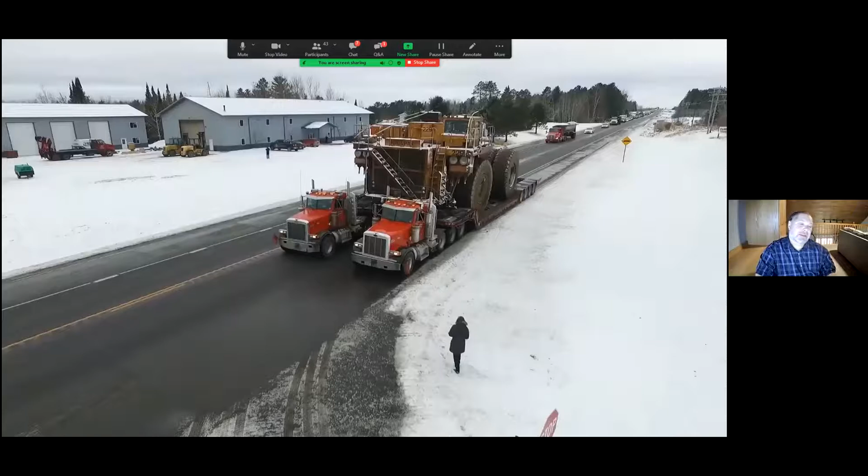The reality of transporting oversized overweight loads becomes more difficult each year. Identifying and maintaining sustainable routes is also becoming more problematic. Oversized commodities are getting larger and heavier each year, making it difficult to compete with the aging road system.

And this couldn't be truer than with the wind energy transportation section. The journey of the wind blade is a story that I'd like to share with you today. These blades attach to the wind turbines that create electricity, and they're getting much longer. Today, the average wind blade is about 300 feet long when it's loaded onto the truck. Imagine the size of something like this going down the road—it's nearly the size of a football field. So they are extraordinary in size.

Green energy wind farms continue to grow in number across the country, increasing the demand for these large components to be delivered by truck. Sometimes trying to get into remote locations is difficult due to road design.

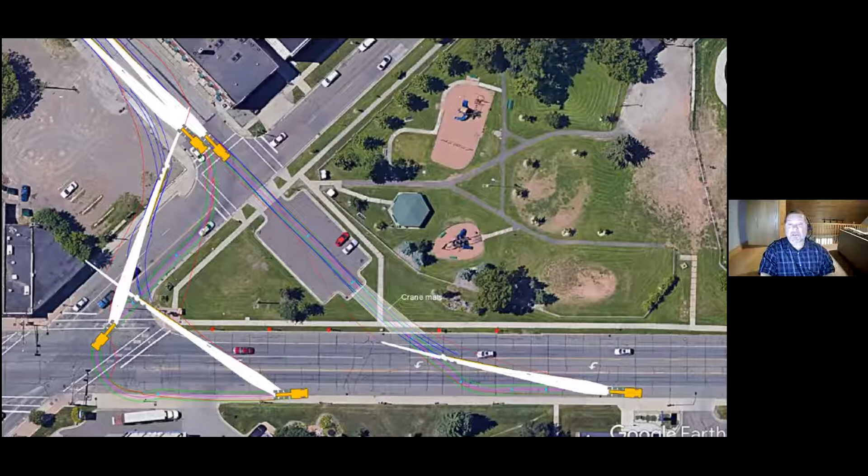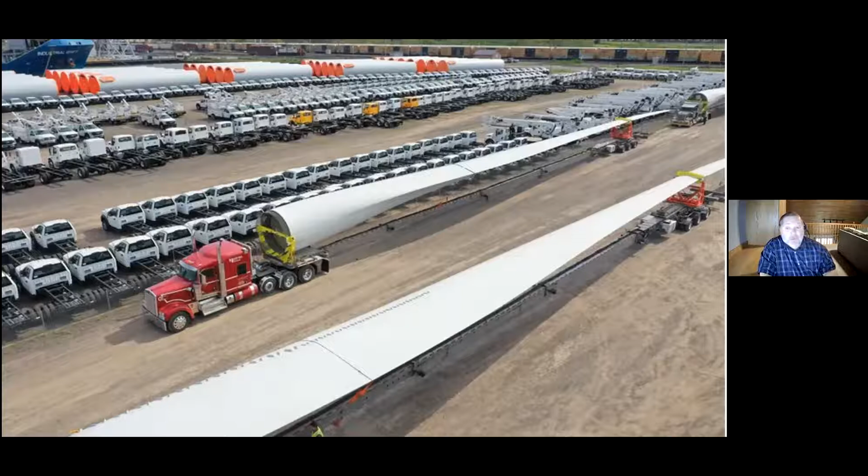The wind blades that arrive by ship are offloaded onto these specialized trucks here that you see, and they're often driven from the port right to their destination, that being the wind farm, somewhere in the United States. Sometimes wind blades will come to the Port of Duluth and then go out to the state of Wyoming, South Dakota, or North Dakota.

So I'm going to share a video. This is a neat video - actually a video of blades being transported from the manufacturer in Spain that I just mentioned to their Castellon port, which is where they load their ships. These videos show the massive size and complexities of moving these large wind blades. I'll apologize now, the video quality isn't the best, but it still gives you a good idea of how big these really are and maybe what some of the challenges are with the transportation system.

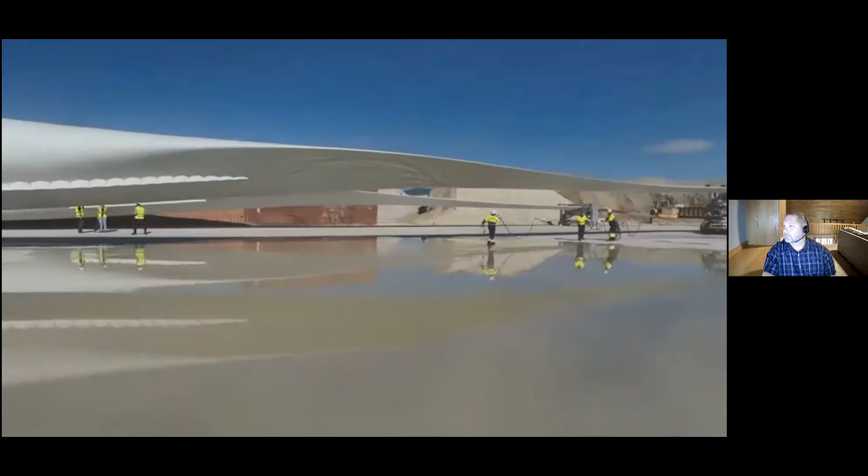that's it for that video.

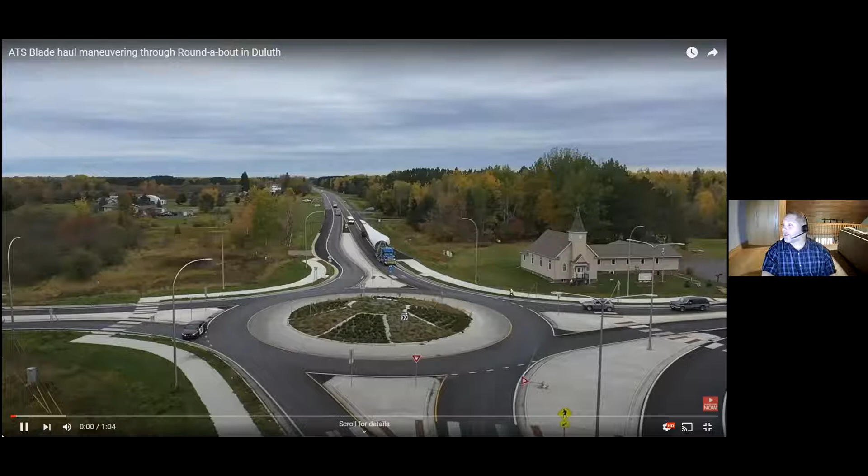With these long wind blades, they can't just go straight through or go down the normal lane of travel. They have to do special maneuvers just to get through. This is an example of a move just outside of Duluth in one of our own roundabouts and how that's actually done.

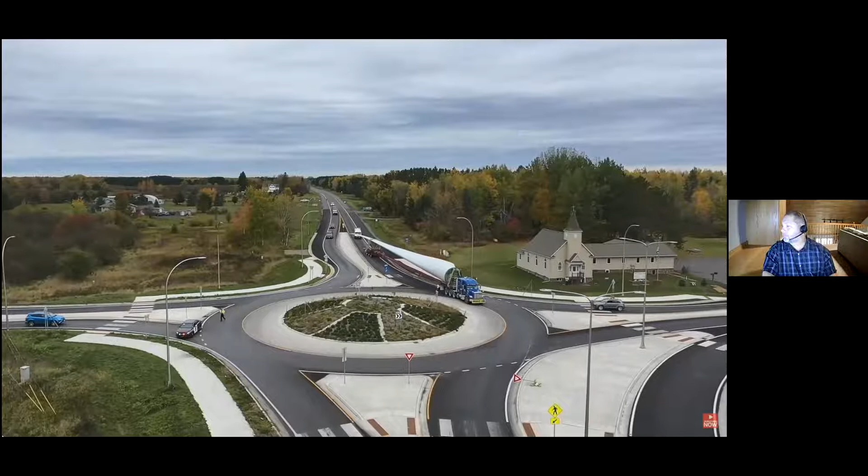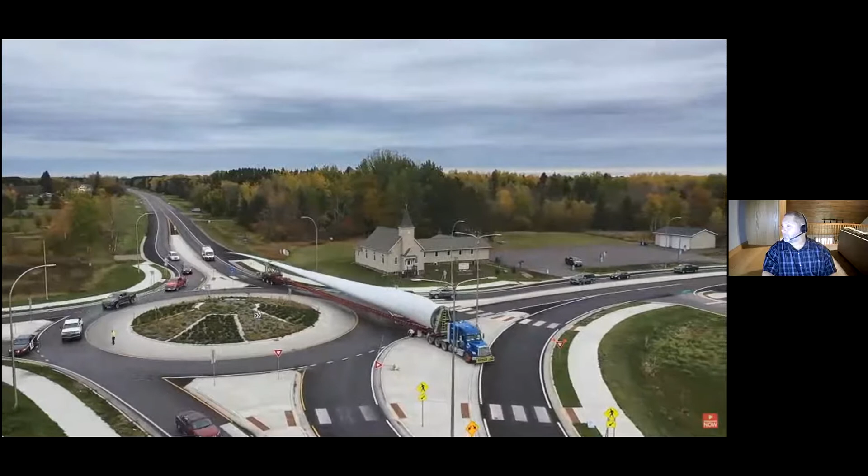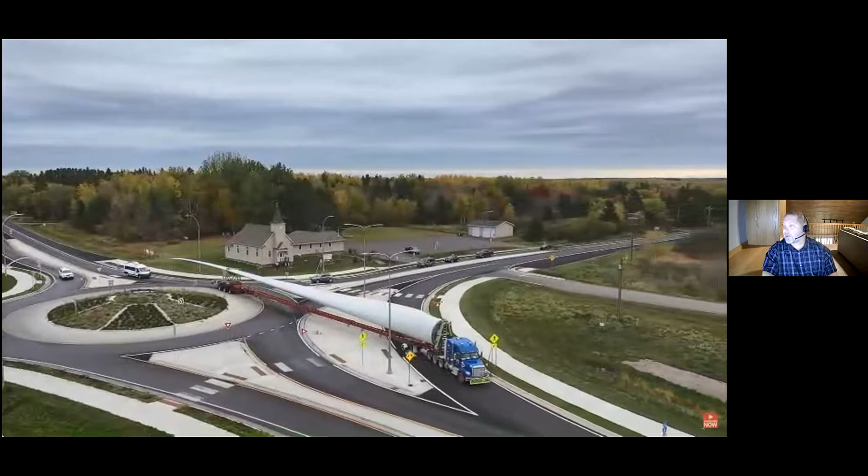Now, when you look at our roundabout designs here too, you can see that the engineers have kind of designed these with wind blades in mind, with sloped curbs, removable signage, a large truck apron on the roundabout circle itself, which help.

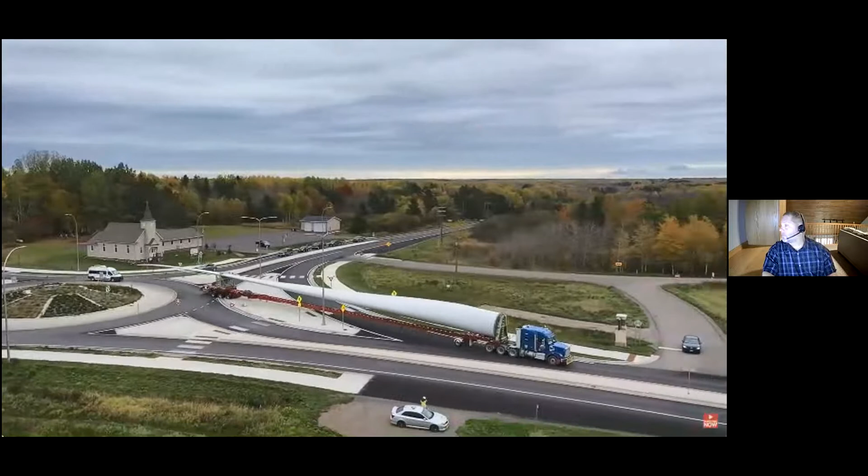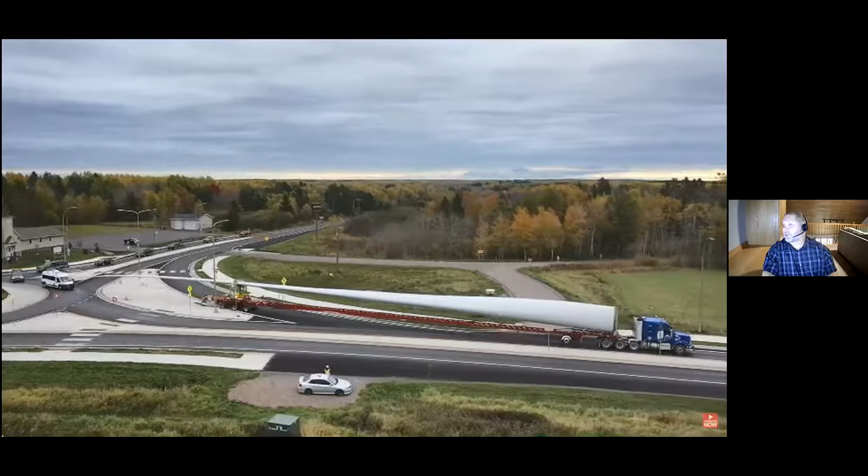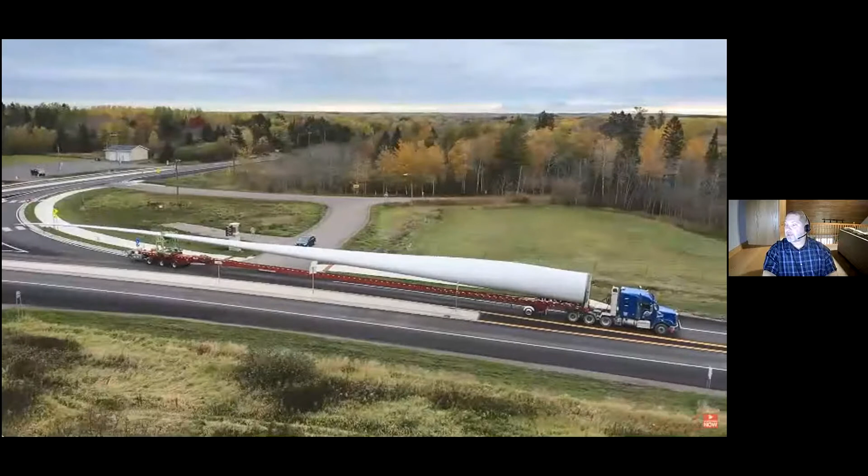But you can see even in that short amount of time, just the traffic impacts already, traffic starting to back up, just because it takes a significant amount of time for these to actually maneuver and travel through circumstances such as this. Again, with a lot of these vehicle types, they have special articulating rear axles, so they are hydraulic steering. So there is somebody that walks behind or drives behind in a vehicle and actually steers that vehicle from the backside to help manage that turn.

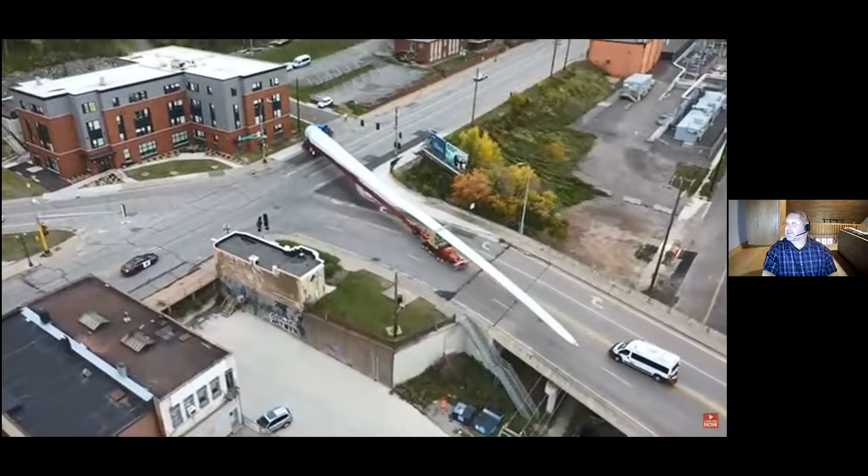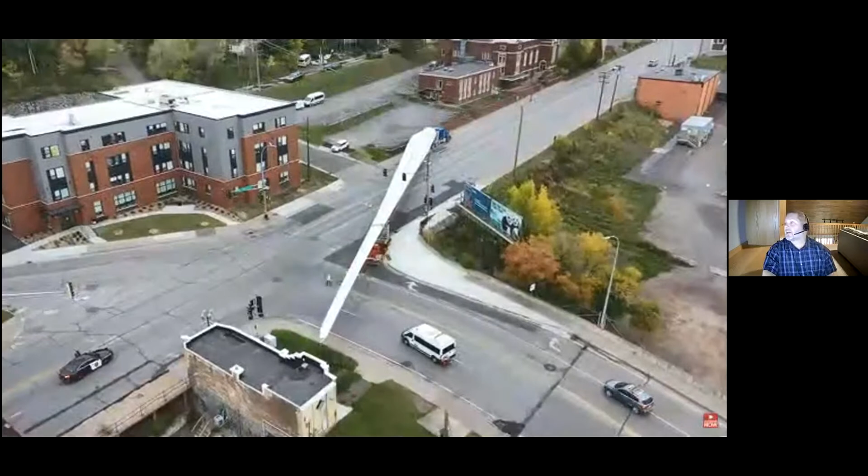At this particular intersection, they had to remove a bunch of infrastructure. So right now where you see that blade swinging, there was a bus stop there where people would be sitting waiting for their bus. They had to take all of that down for this particular project, which actually was about 170 blades. So for that entire summer, significant changes had to be made just for that specific intersection to mitigate these moves.

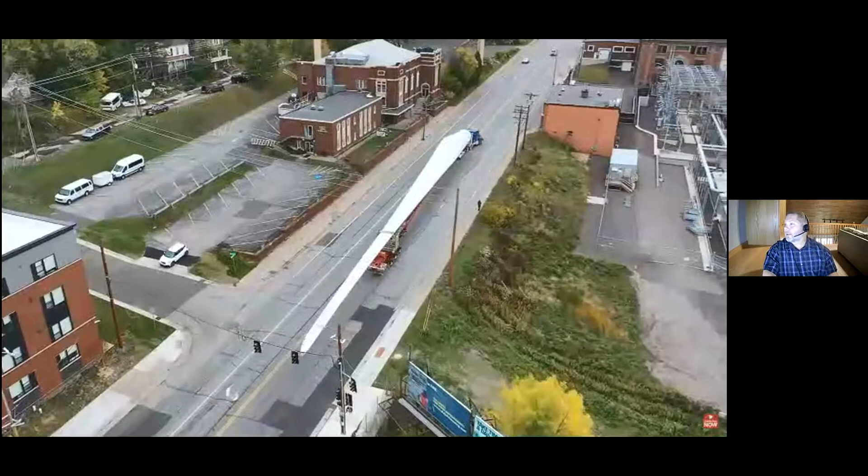Here's another situation that we've seen throughout the state with these wind blades getting so large. And again, you go back and you look at our aging infrastructure, our road designs. Back when these were built, you know, things were much different. And now you introduce something like this.

Here's an example of a truck that needs to make a right-hand turn. So from left to right, you can see, I'll kind of use my pointer here too. I think you'll be able to see that. But he started here and the driver was going this way. Well, because of the swing, they were unable to make this right-hand turn. So they had to do what's called a three-point turn. So they went straight. They backed this long blade up this angled hill here and then continued forward to make that turn. I actually have a couple of examples of what that looks like on some of our state highways.

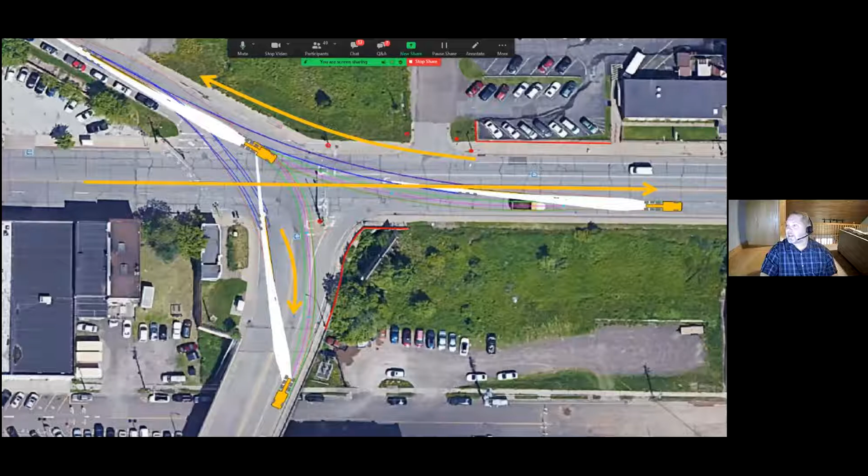And this is why sustainable routes are so important. That's our goal. In oversized overweight permits, the biggest thing that we can do is identify and determine a sustainable route for the duration of a project. And again, when you're talking about 1,500 trucks in a 4 to 5 month period, that's a lot of movement. And you cannot always be tying up traffic like that at those three-point turn locations where turns need to be managed. So, you know, in summary, moving wind is a challenge for the good of sustainability, right?

In the years to come, it's only going to expand. So really, seeing what you've seen and knowing what you know, what is the direction of our future, and what can you be thinking about now that would help improve the transportation system for commodities like this.

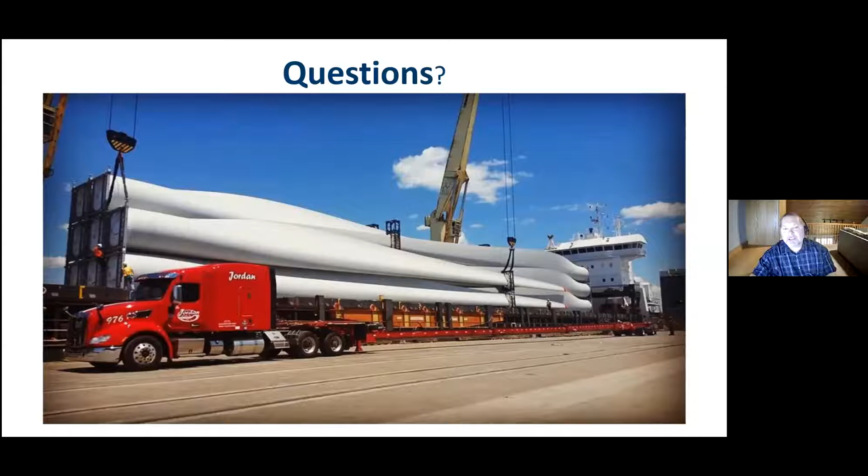Thank you. Yeah, Rob, that's great. We do have a bunch of questions. I have one before I let everybody else ask. Do they normally move them one at a time, or is it like a big train of these moving down to the wind turbines? That's a really good question.

So we have certain, we'll call them rules, where we normally do not allow what we call convoying. But in situations like this, we do make exceptions.

These will generally go out 3 at a time in Minnesota, but they have to maintain a minimum of a 1 mile distance or even a 15-minute span between, so that when they're making special maneuvers, they're not tying up a specific intersection for too long. One goes through traffic and clears, another comes through, clears, just to keep the pace of things. Because if everybody went through at once, it could tie up a busy intersection for 15, 20, 30 minutes. So we try to avoid that.

We've got a good question from Megan. She says, why don't they use airplanes to drop the blades off? Megan, wouldn't that be great? I would love it. Even big helicopters. That would make it so much easier.

I think the problem is, how would you land the plane close enough to the site, the wind farm? A lot of these wind farms are out in the country, in farming communities, in rural areas. It would be hard to get the plane in there.

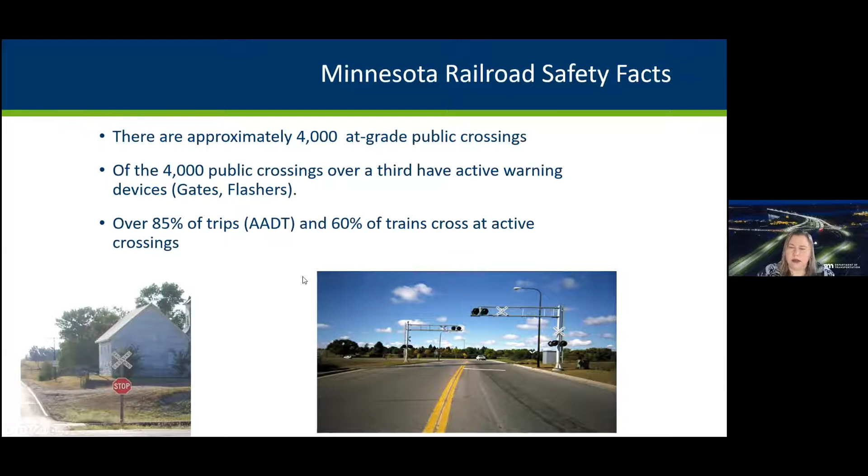All right, so what is all this stuff that we have for safety? On the left, we have a passive crossing. It has a crossbuck, which is this, a stop sign. It could be a yield sign. And what you can't see here is there's a little ENS sign. I'll talk about that in a minute.

Over here on the active crossing, we have gates, which are a little bit difficult to see. They're up and down here. They're in the vertical position, but you've seen those. Those will come down and stop traffic from crossing the tracks when a train is coming through. We have cantilevers at some crossings that will have lights flashing over the top of the traffic. We have the flashers, and we have that crossbuck there again.

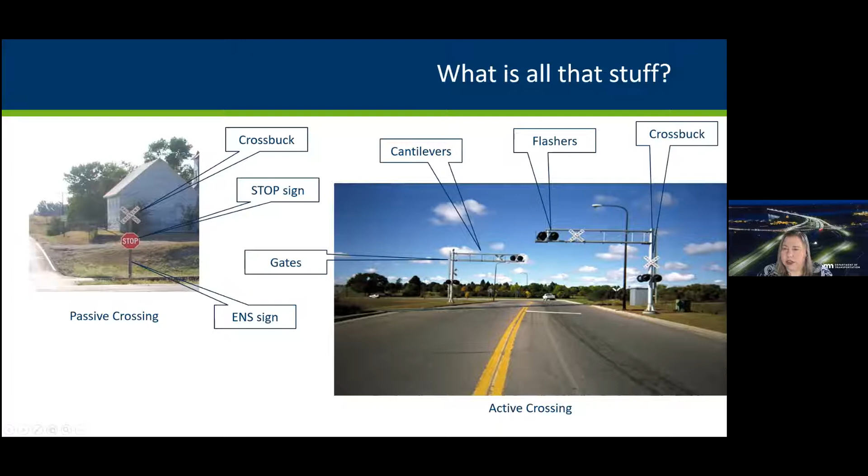And what you couldn't really see very well is at every crossing, we have this little blue sign. I'm going to talk about that again in a little bit, but it's called the ENS sign. It's an emergency notification sign, and it's at every crossing.

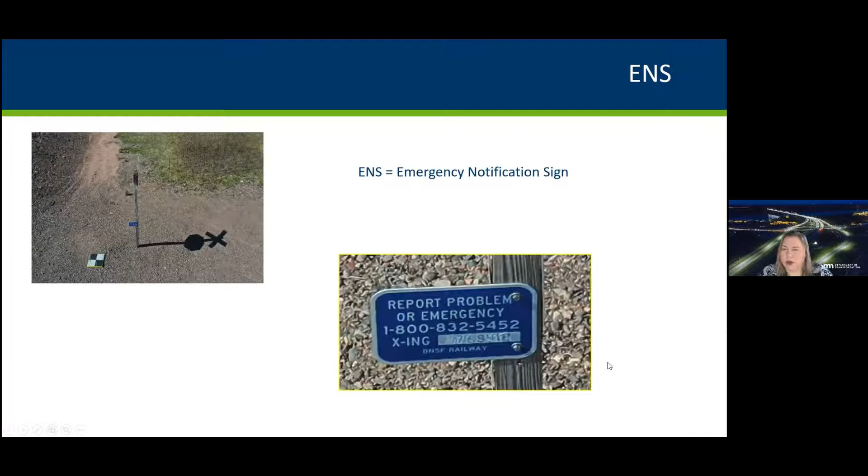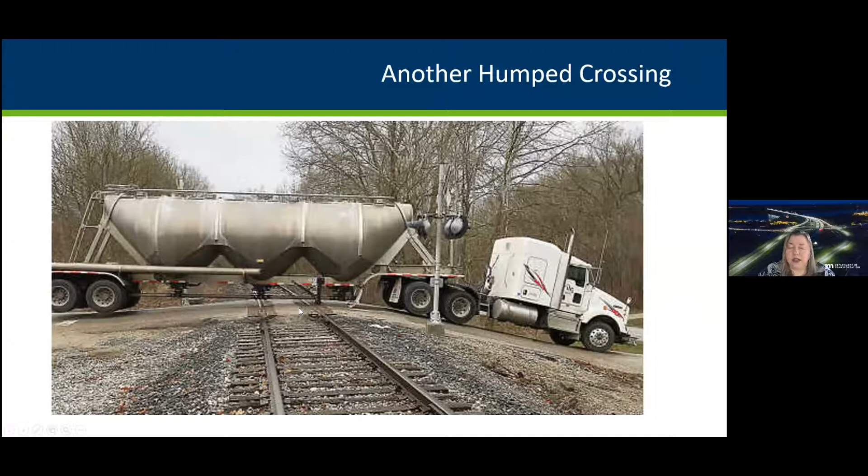Here's another example of a humped crossing. If you notice, there's a piece right in the middle here of this truck that got hung up and now is in the down position, and the back wheels are hanging in the air, and the wheels behind the cab are also in the air. We've only got two wheels on the ground there. So obviously that truck is stuck and is going to need some help getting off of those train tracks as well.

So if you're caught in a situation like this, as a truck driver, what do you do when you're stuck on the tracks? First of all, get everybody out of the vehicle. If you have injuries, someone needs to call 911. And then you need to find that little blue sign that I talked about and call the number, which goes directly to the railroad dispatch. Give the dispatch operator the USDOT crossing number and all of the details. They can radio ahead to their crews on the trains, and have them slow down and stop so that they don't have to slam on their brakes and more than likely hit someone because they didn't know that they were there.

Like I said, each one of those has its unique 800 number that goes right to the dispatch of the correct railroad, and there is a number that corresponds to each crossing.

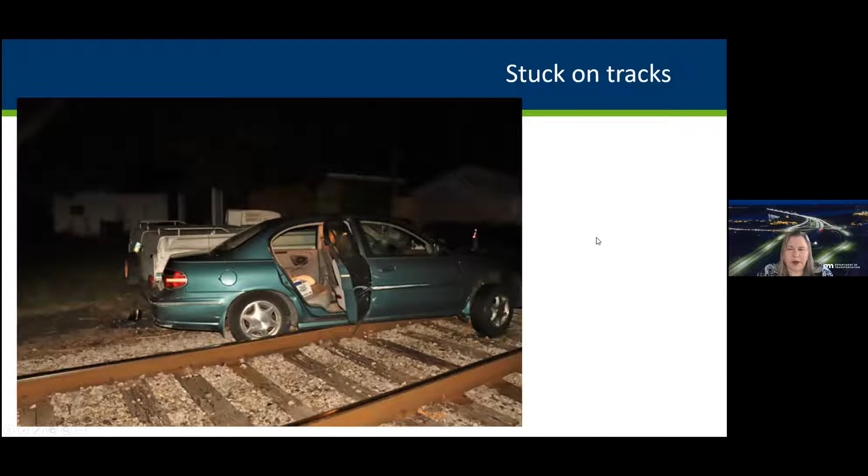Here's another incident where someone made a mistake and turned down a railroad track thinking it was a street. They got stuck on the track. Again, they were able to get out, and they called 911, who called the railroad dispatch. People make mistakes, and truck drivers and passenger cars are no exception to that rule. So that's why we have those signs, and everyone needs to know what to do in these situations.

So I'm going to talk a little bit about some research that we've been working on, or participating in, here in our office. This is a humped crossing, like I showed you. This spring, we went out and did some experiments using drones to inspect these railroad crossings. Like I said, we have over 4,000 crossings that I'm responsible for.

Within a 3-year period, I need to send somebody out and take 12 pictures at each crossing, multiple measurements and data points, and you can imagine that takes a lot of time. From the picture here that was captured by my consultant, I'm not sure you can really tell, but that's got quite a slope to it, and it's quite a hazard to trucks and large vehicles.

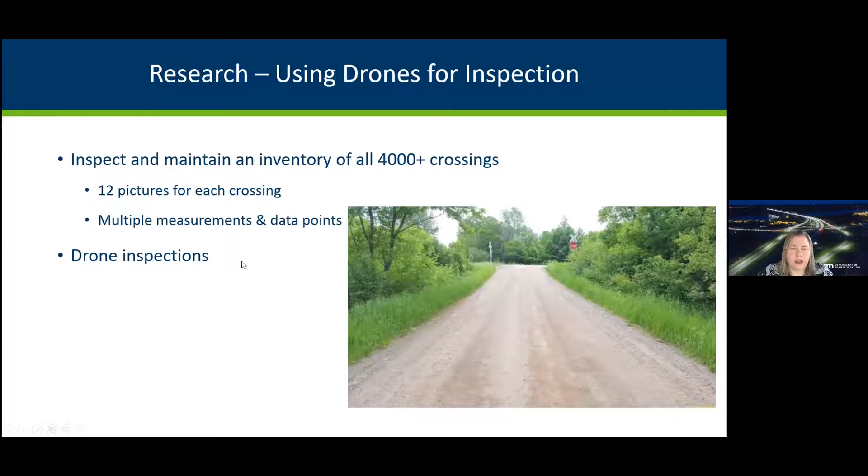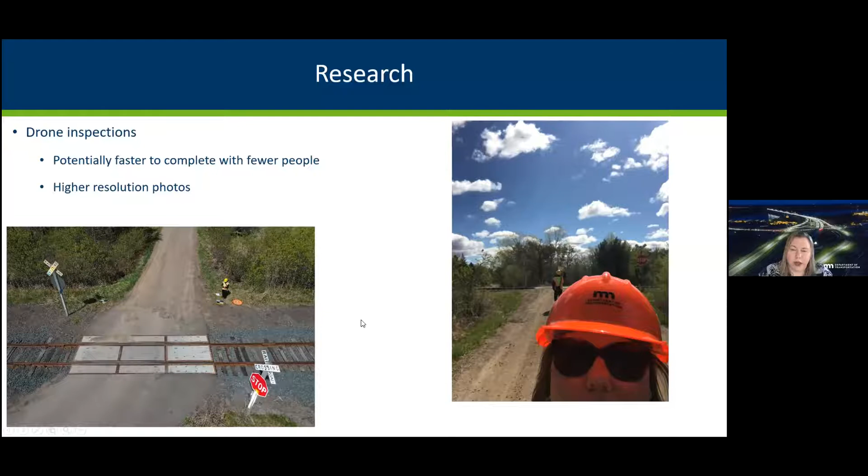So those are all things that I need to kind of have a handle on to keep the traveling public safe when they're crossing these railroad crossings, and keep them from interacting with trains and railroads.

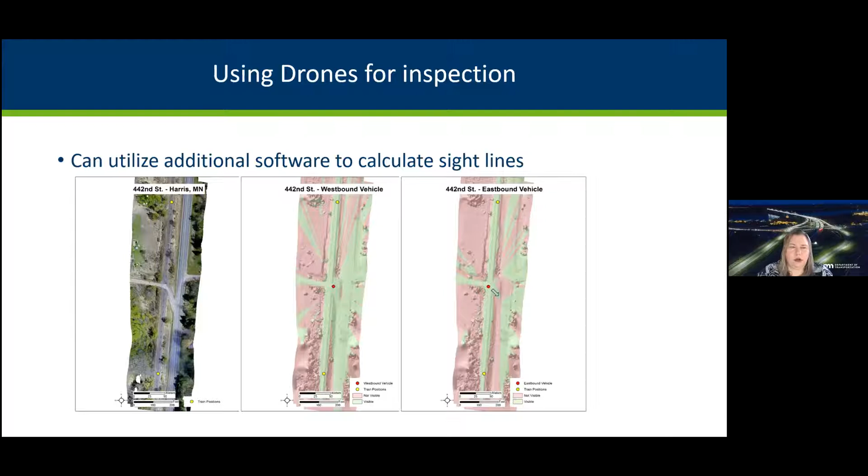All right, so switching gears just a little bit, I'm going to give you just a couple minutes of the other part of my job here: weigh stations. There are two things that happen with our weight and safety enforcement program that I'm involved with. We have weight enforcement, where you may have seen weigh stations on the side of the road, where a truck will enter in and run over a scale to get weighed, making sure that they are within the legal limits of what that truck is allowed to carry.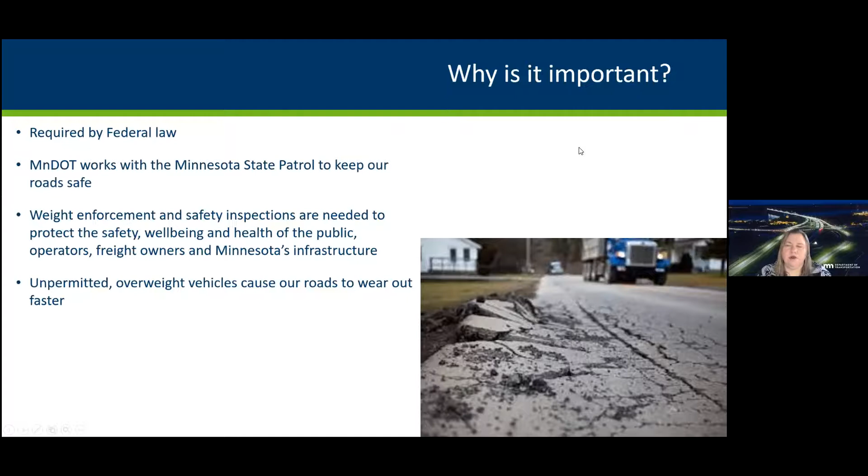So removing unsafe equipment and unsafe drivers from the road makes it safer for everyone. Removing an unsafe vehicle from the roadway may save a life here in Minnesota. It may protect our freight getting to our local Target and our local businesses, or it may save a life 2 days from now in Colorado or wherever else that transit was on its way to.

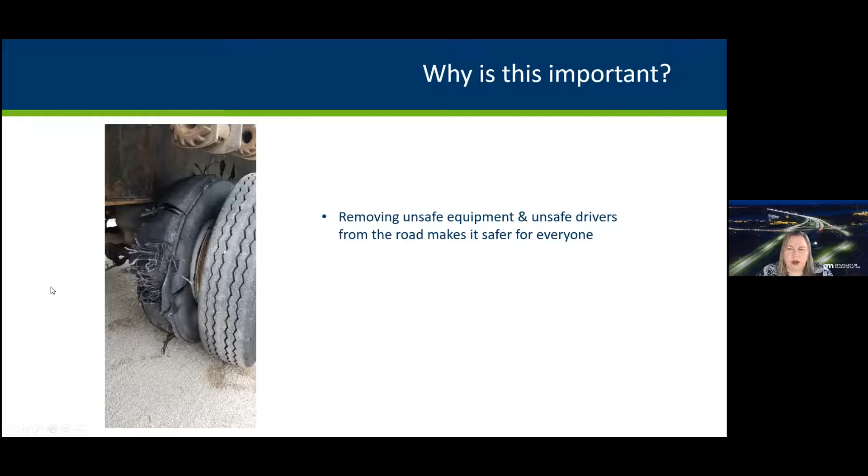The first question: how do you know the maximum weight capacity a road can take? That's a good question. Well, the roads are designed to handle trucks that are usually, a standard truck is, it depends on the number of axles that each truck has. It's really about spreading out that weight over each axle so that you don't have, say, the front of your trailer carrying 40,000 pounds versus the back of the trailer only having maybe 10,000 pounds. Those need to be spread out throughout the axles to make the force on each tire - that's what does the damage to the roads. So we have federal regulations and state regulations on exactly what that truck can hold on each axle, and that varies from vehicle to vehicle.

All of that is available in our state statutes for truck drivers. A lot of times if we have a truck that's unsafely loaded and unevenly loaded, State Patrol will pull those folks off to the side of a weigh station, and they will have them redistribute their load so that they are having smaller point loads on each of those axles and do much less damage to our roads. So it's not so much about how much can I-94 hold, it's how much pressure is coming from each tire.

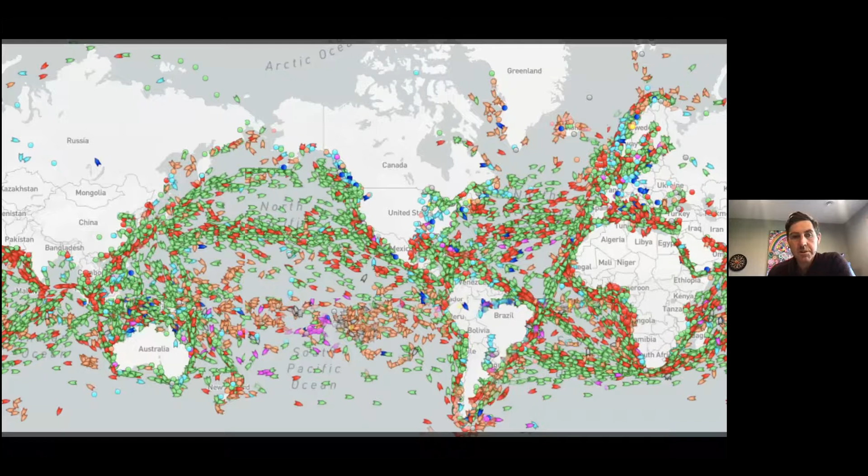We talked earlier about trains as well. A train, as Julie talked about, can be up to a mile long, and so they can carry vast amounts of stuff.

Understanding the cost trade-off, why would you use a railroad versus a truck, similar to the ship question, I think is a very interesting thing that you may want to be able to research. Trying to understand when you would use a train rather than a truck or a plane is maybe something that you could research and understand, and see if you could invent a better way to help the rail network work.

Obviously, trucks are a primary way that goods are transported. It was really interesting to see the examples of how trucks can struggle with different infrastructure in both Julie's and Rob's presentations. And I've seen similar cases around the US and around the world where ensuring that trucks know where they're going, are going to the correct places, and have safe ways to get there is a problem we can continue to make progress on.

And again, the question of why do we use trucks so often? Why don't we use more ships or planes or trains is an area where you may be able to find reasons why, or maybe you can find reasons why we should change how we use trucks.

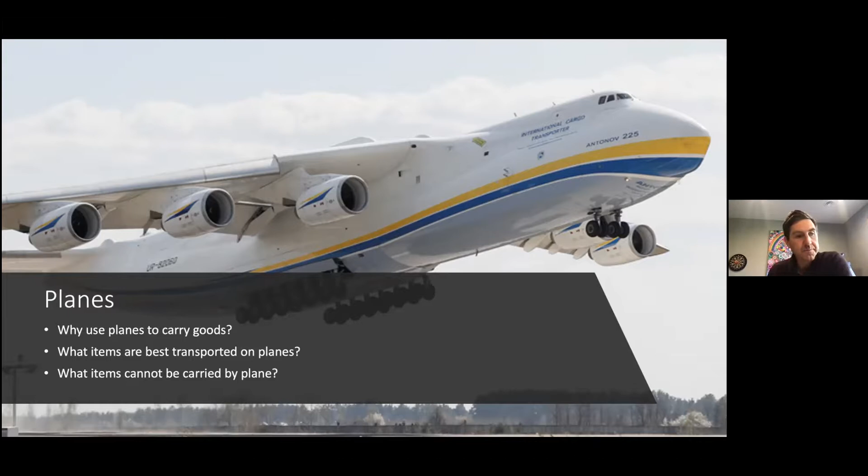And the question that I've got for all of you, and some of the questions in the Q&A had pointed to some of these, is what is next? How can you improve trains, planes, trucks, or ships? How can we create new ways to move those goods?

Someone in the comments asked, why aren't we using drones to deliver packages? That's certainly something people are talking about. There are package delivery robots that people are inventing. We're continuing to work on better technology to plan and optimize how things are going together. Maybe you have an idea of how you could eliminate wasteful steps in the process or come up with a safer way to deliver goods between factories, warehouses, or all the way to you and me as end consumers. Maybe we need to build bigger vehicles. Maybe we need to have more smaller vehicles to have more flexibility.

This is where I think it's really exciting for all of you to be able to go learn more and come up with your own ideas of how we can continue to make transportation safer, faster, cheaper, and more environmentally sustainable. So that's what I've got. I'm happy to answer any questions that people may have. And we have some already.

We've got a good question from Michael. How do you handle temperature sensitive products like bananas or lettuce? How do they travel? That's a great question. So some of these shipping containers have temperature control built into them. And within the ships and the trucks, there's special power units and ways to ensure that the air conditioner or heater, whatever it is that needs to keep the temperature in line, is working properly. And then there are both automated systems and manual processes where people on the ship or truck drivers will be monitoring the temperature to ensure that it always stays within a certain range to keep the goods fresh and healthy.

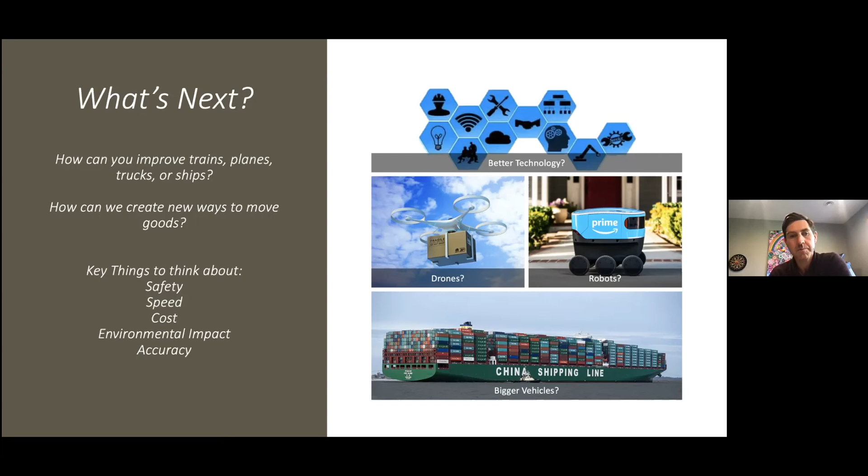As I'm looking at the questions, I think some of them are great research projects. We were successful in getting kids to think about some of the challenges of transportation, and they're already coming up with great ideas. So I'm going to leave it to your teams to figure out how you're going to research that.